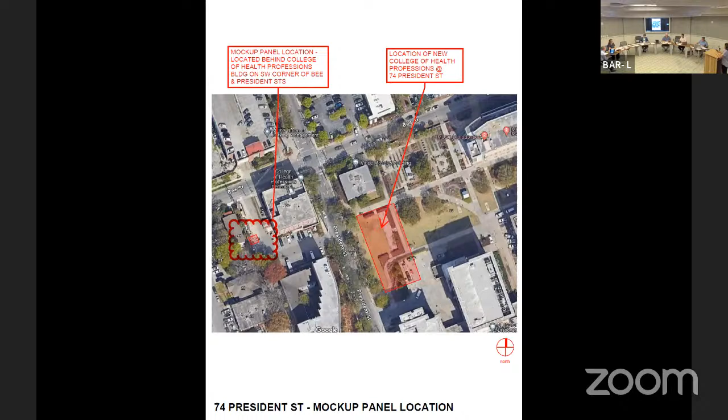First slide we have is the mock-up panel location, so that anyone that's able to go by and take a look can find it, showing the project location just south of the corner of Bee and President Street downtown. And then we have a couple of photos of the completed mock-up panel. I do have boards showing the full elevations if there are any questions about where the materials occur, where details occur on the building, that I'm happy to pull out.

The south side of the mock-up panel shows the stucco finish at the bottom, transitioning to ACM, the brick finish that will occur on floors 2 through 5 of the building, and then the ACM panels that will occur at floor 6 on the building.

And then the east side of the panel shows the stucco that is the first floor material on the building, curtain wall that spans on a couple of sides of the building from the 2nd floor up through the 6th floor. And then the setback metal panels occur at the penthouse level, the 7th floor of the building, and typically are set back from the primary building facades.

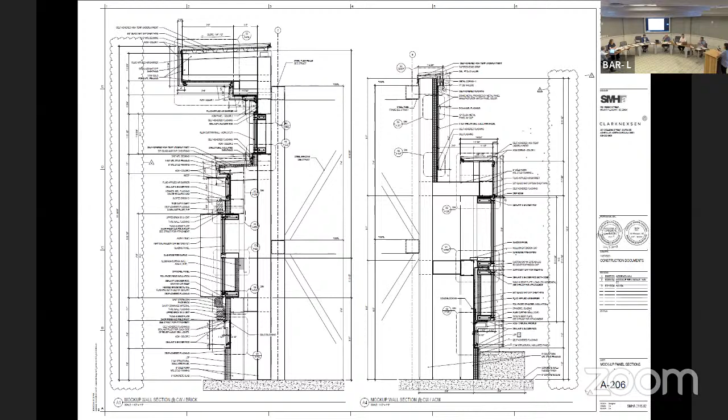And then we have sections of the mock-up panel and elevations as well. And that may be the end of our presentation. Thank you, Margie. Thank you.

Well, I mean, does anybody have any questions for Margie? And then public comment. I didn't anticipate that there would be. I know, but you know, we just protocol just in case. Yeah, you're right. Okay, yeah.

Sealant colors have been discussed extensively, and the applicant is willing to continue to work with staff until an acceptable generalized brick and mortar blended color is found, which may be used almost everywhere for elements in and on the brick wall. While the addition of the metal panel system below the storefront system is not quite as it will be on the building, staff is persuaded that it will in fact be an easier condition to deal with on the building and is therefore acceptable.

A more appropriate flood vent color closer to the stucco base color is being explored. These occur behind the historic wall and are minimally visible. And due to the length of the vertical fins at the storefront, applicant and contractor are recommending either exposed fasteners at intervals to match the storefront or the application of an extra trim piece to conceal them. Staff prefers painting of these small, distant, and minimally visible fastener heads with a high-performance exterior paint to help avoid maintenance issues in the future.

Conditions for approval: applicant and contractor are to continue to work with staff on all above items, and staff recommendation is for approval with board and staff conditions.

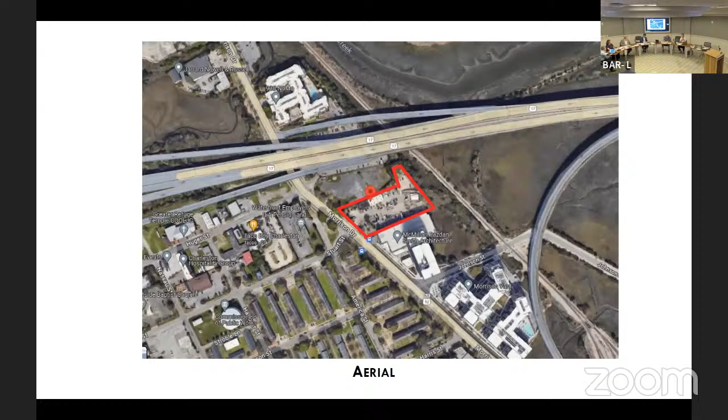And just to remind everybody, this is the location of the project. We're ready for applicant presentation. All right, yep, got a couple of show and tell for you guys. All of the administration, along with that. Representative.

I think I'm going to take a run at using the clicker. Is that all right? Got to be. Good. A couple things here. I'm not going to dwell on that, nor am I going to read this, but again, we want to really focus on a couple things. Specifically, the first item is what you see in the model there.

We'll also see more details of that, and that's more defined fenestration, more details. And you'll see that pretty clearly in comparing and contrasting between the previous renderings that we used last time and where we are today. And we'll talk more about the details and things that make up that composition.

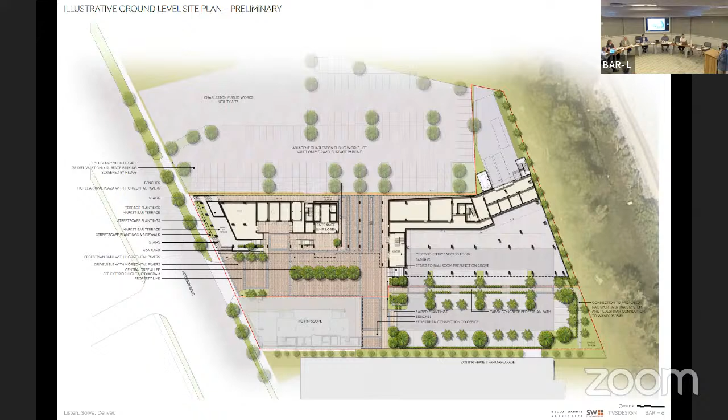You're seeing that a little bit more clearly here. We'll talk more about materials and you'll see some of those later on in the presentation. Not going to dwell on floor plans, nothing of significant change here that we haven't already addressed, so we'll click through those fairly quickly.

Here we get up through the building, typical floors. Again, these are before and after, so you're seeing a lot of what we had previously presented versus what we have now. No dramatic changes, just more development as you see in the plans.

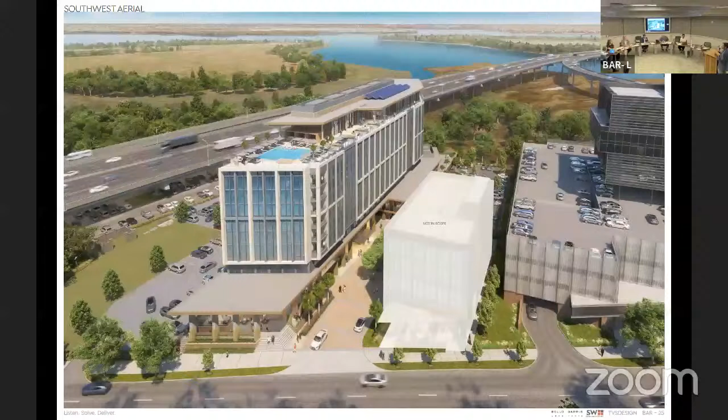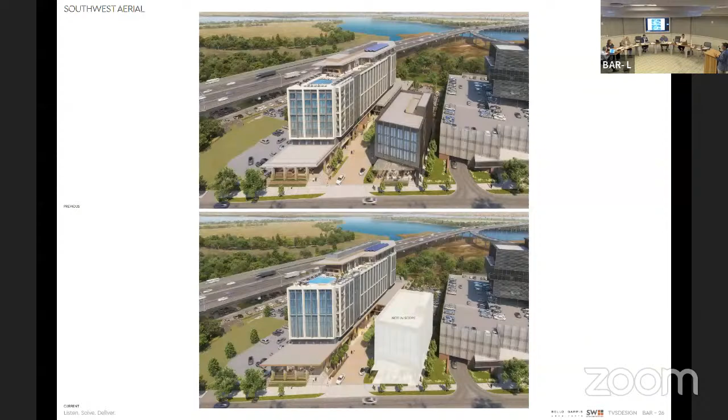An aerial view sitting within the context of Morrison Drive, the massing of the building. We'll see more specifically as we zoom in on the facade where we're beginning to create more articulation and definition within the facades. You're starting to see some slight color shifts where we're looking at GFRC materials that have more of a warmer tone, less of a white bright tone.

I think we're starting to blend those and find some unification in that color palette. You'll see that again as we move through some of these. I think this is a good example: the image on the top is what we presented for early phase last time we were here, and the image on the bottom is where we are today.

Specifically, as you look at the fenestration on that facade, it's pretty clear you see not only a color shift in the material palette, but the way the fenestration begins to work, you're seeing less of a pattern of windows that feels square-like, but things that begin to create more of a rhythm and a vertical orientation on the building. It's a big building, but the idea is to begin to break that down in scale and look at how beautifying those elements are.

We'll see some more details in a minute, specifically on the balcony edges. There were some comments previously about how they felt a little heavy. So as we move through this, you'll begin to see this is where we are now.

This is a zoomed in version, the north facade. As you look at this, you see the major components within the building. You're seeing the articulation of the frames. The lighter color is the GFRC. Inset within that is the window and glazing.

The glazing quantities are the same as what we had before, so there's no change in the glazing. We haven't reduced glazing, we've kept the same amount. You're seeing more details and refinement on the interstitial, or in between those frames, so you're getting some nice dimensional depth in the building and nice shadow plays.

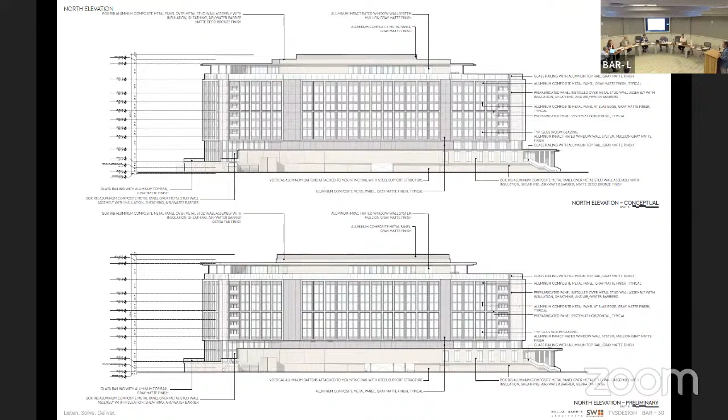And then as we get into this, we're starting to look at components, or what we call components. You're starting to take pieces of the building and really study that from an architectural character, image, details, how those work both in section, elevation, as well as axonometric.

And then zooming in yet again, you're starting to see how all those pieces come together. This is evolving. You're starting to see more refinement, not only in the facade and the fenestration, but the way we begin to resolve these as a system.

Again, we're just moving around, looking at different parts of the building that are unique, things that we need to begin to develop. Certainly looking at the top or parapet of the building where you're transitioning, looking at glass rails, things that lighten the top of the building and not create a heavy expression.

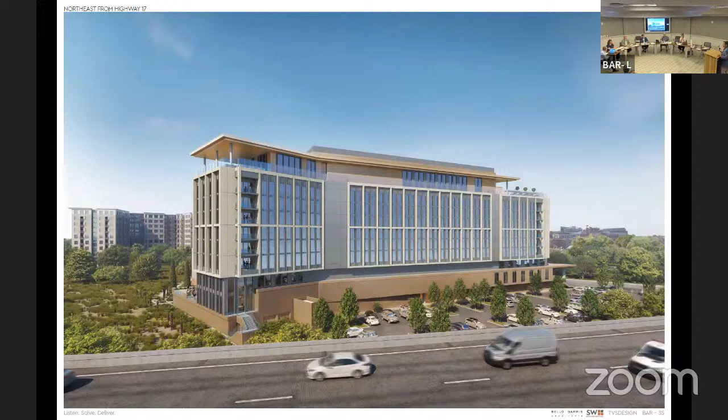More of an elevated bird's eye view, if you will, over the connector, looking back at the fenestration on that north facade.

Again, more of an eye level view, maybe an in-town approach view from Mount Pleasant. The top is what we previously presented. The bottom, you start to really register some of the articulation and the depth in the facade, the shadow play on the building, and things like that, accentuating that scale and mass.

Let's get more components, really taking a deep dive on some of these. This is the southbound view on Morrison. Top view is where we were previously, the bottom view is where we are today.

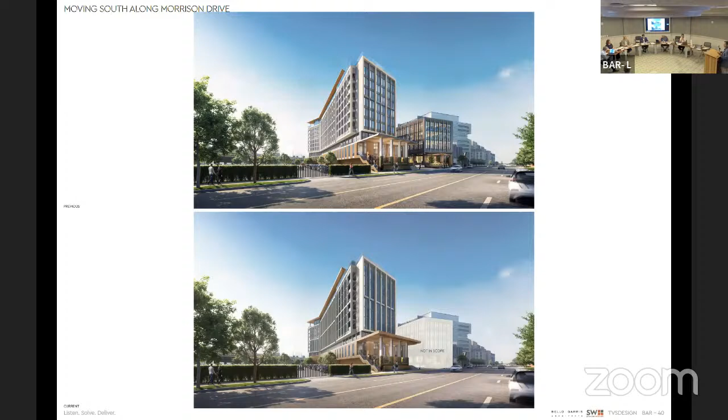Again, I think some really nice refinement in this, really getting the details starting to pop in this building, and having that shadow play and that depth in the system really, I think, is starting to help break down some of those different facades.

Corresponding elevations, again, more details, some views kind of looking down that arrival, entry into the development site, and through to the water again. Those have always been important, so maintaining those as vistas and view corridors.

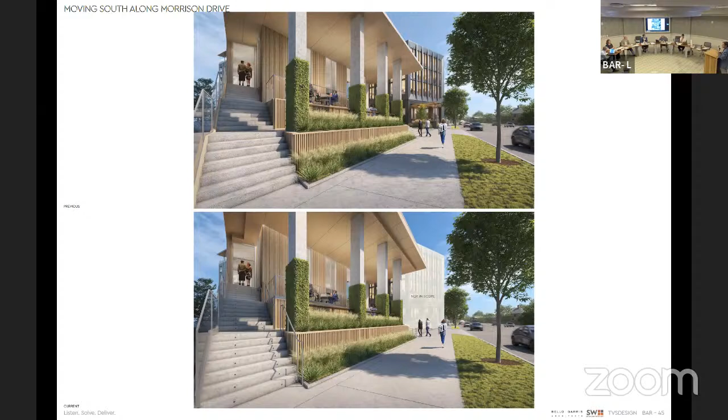Along Morrison, not a lot of change here, really, just responding to transitioning down to the street. We've got flood zones and other requirements that are making us elevate the building. I know we've had conversations about LiMWA and things like that elevating the building, so finding graceful and subtle ways to transition the building down.

More details corresponding to that, and a couple other views that begin to show again the before and after fenestration.

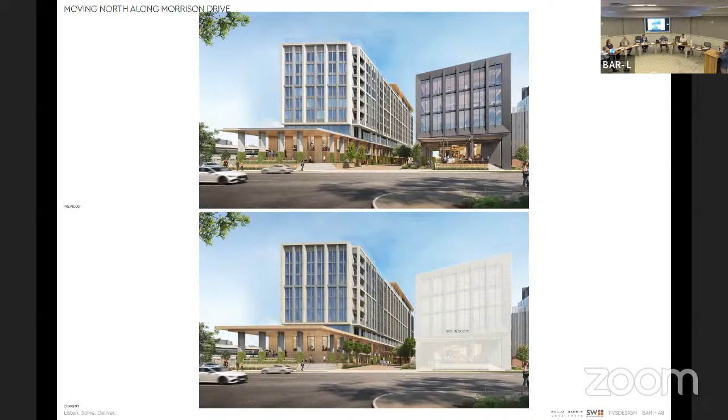Let's see, we'll click through these. We've got canopy details, other things you're starting to see in that model. Aerial views, again, just taking what we've shown before, beginning to show kind of an evolution to that.

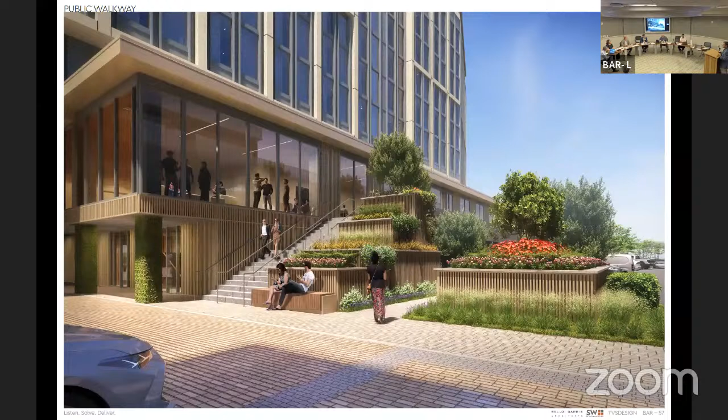Parking and plaza and arrival, looking at landscape solutions, hardscape solutions, how to begin to integrate terraces and other parking elements within the arrival plaza.

This is more of the material palette. So again, you're starting to see some of the hardscape finishes, and some of the landscape finishes that are carried through the project.

Lighting. We're all well aware of the sensitivity of lighting in projects in this context. So being sensitive to that is of paramount importance, but also making sure that we meet minimum code requirements, which is something we're obligated to do, but doing that in a sensitive way.

I think what we want to try to avoid - you want to maintain the code requirements for lighting, but do that in a very sensitive way. Something that doesn't feel like you're looking at direct fixtures, something that feels like it's more of a subtle illumination on the building, and not something harsh and dominating on the building.

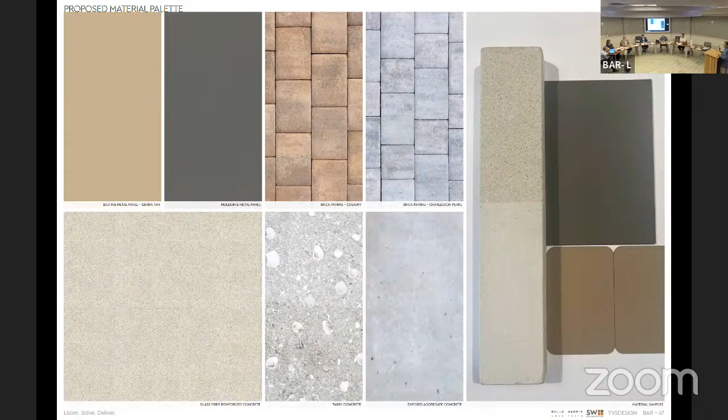I believe that was it, right? So I didn't check my watch. Okay, 9 minutes. Congratulations. Might be a first. Yes, sir.

Any questions from the board? Yeah, so the previous application had the adjacent building with it, and this one does not. Correct - what's the story with that? It's separate, and it's my first staff comment - it's separate, it'll come through preliminary on its own track. And I read that, but do you anticipate that changes completely in its application? It's gone through and been approved for height, scale and mass. Of course, is that right? That's right. So you don't anticipate starting over? We do not anticipate starting over.

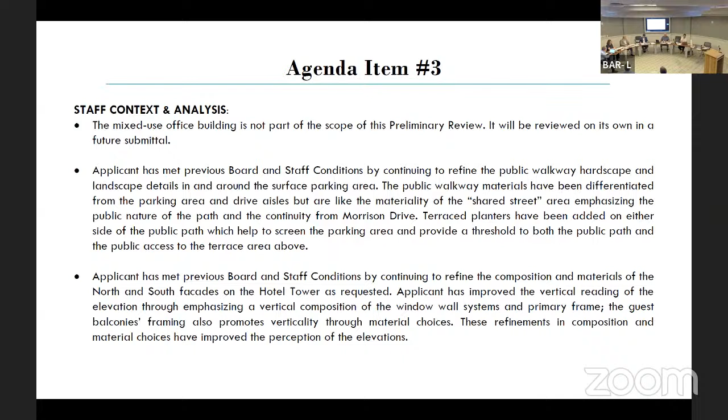Applicant has met previous board and staff conditions by continuing to refine the composition and materials of the north and south facades of the hotel tower as requested. Applicant has improved the vertical reading of the elevation by emphasizing a vertical composition of the window wall system and primary frame. The guest balcony framing also provides verticality through the material choices. These refinements have improved the perception of the elevations. We have no staff conditions for approval, and we recommend preliminary approval with board conditions.

Oh, I'm sorry, I got a text from my wife, got to answer that. All right, any applicant response to that? I imagine there might not be. I might have a couple of things to say. We had an extra minute.

Eddie Bello: just to emphasize on the lighting, it's early, but the intent is to follow the BAR policy. We do not want to light up the building. We just need some lighting at the ground plane for circulation. So just to be clear, and it's early, we've got to figure that out, but we do not want to light up the building. I want to make sure that's clear.

I think we agree with everything you said. What I wanted to stress was a lot of work has been done, as is the case after a conceptual to preliminary phase on a project of this size. We have gone through a lot with our contractors to ensure we're on track for pricing, which is a big deal. But the key takeaway is that as we've developed it, the building's gotten much better. It's much more refined, it's a lot lighter. It's a big building, but it's a lot more elegant. It's got more depth. I want to reinforce that it's not just more work, we've actually strengthened it.

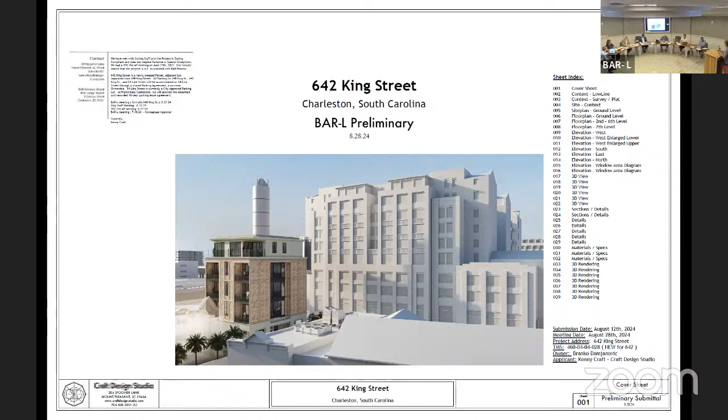Been moving along through the process. The backstory: we kind of worked our way down from 8 stories down to 5 stories, going through conceptual to preliminary. The refinement in many ways is sort of a hand-drawn schematic moving to some more refined computer drawings of context, right off King Street, right by the Crosstown.

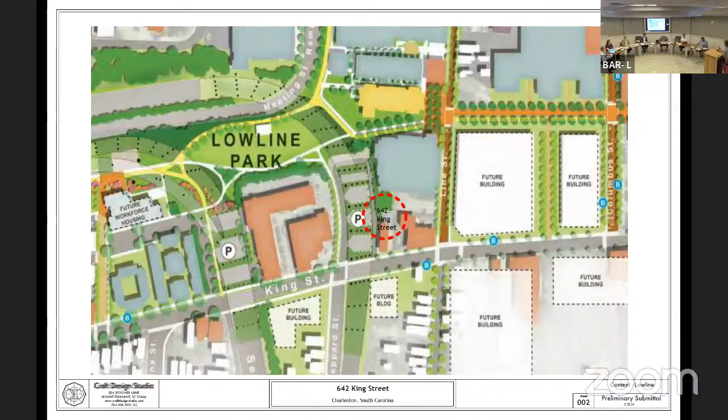It's sort of in the zone of the future Lowline Park—a lot of big activity going on, and a lot of exciting developments in the area, and a lot of building.

The site's front part has a historic house that had been previously renovated. The lot was subdivided so that the rear lot is where the new building is proposed. This kind of gives a little more context.

This ownership of 54 Line Street is shared with the ownership of 640 King and 642 King, so the parking is accommodated through the 54 Line Street parking—the buildings kind of all share access for this parking. Here you can see the 4-story zone toward King Street, as it transitions back to the 8-story zone.

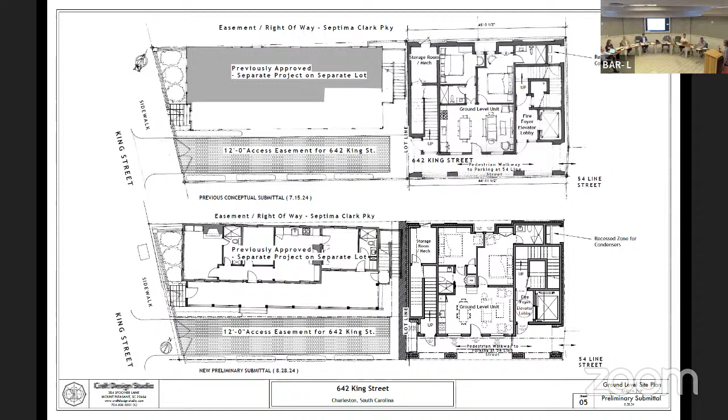This shows the before and after at the conceptual level. I kept it at hand-drawing level, so it's a little hard to see from this stage, but quite a few hours were spent going from hand drawings to computer drawings, with levels of refinement—drywall layers for fire ratings, and an ambulance-sized elevator for the 5-story building. So it doesn't look like a drastic change, and really the design doesn't necessarily change from the floor plan level—it's just a process of developing the hard-line computer drawings and refining all the details and window sizes.

One thing to point out that we worked through along the way is we have a recess alcove on the rear where we have condenser units mounted on the wall vertically, which allows us to not have them on the roof and get away from roof screening, which everybody was happy about.

The 2nd through 4th levels are the same, and this is the refined version of those. Besides refinement in the plan and an officially huge elevator for this little building, we've been working out the details of those sorts of things.

The penthouse level really doesn't necessarily change. Here you can see the hand drawings, how they look. We've got to a level of refinement with the computer CAD elevation drawings, refinement on the base is brick with smooth stucco and score, recessed lines, going with the Charleston tradition of the rusticated stucco base, transitioning to brick through the middle stories.

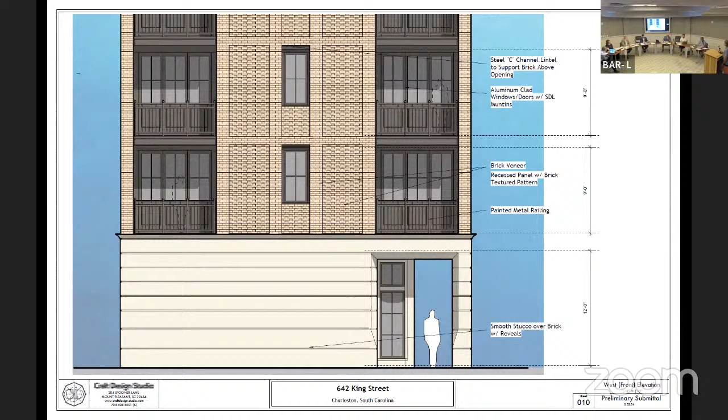We've got these textured recessed panels with a lot of detail that I'll show closer up. The penthouse level has an aluminum cladding system, and we worked our way from more of a shiplap look to an aluminum clad commercial construction. Zooming in a little bit, the design hasn't fundamentally changed, it's more a refinement in the computer drawings and refined details.

Also looking at the color scheme, we have this buff brick and an off-white color for the stucco base, and then also for the aluminum cladding above.

Rear, one thing to point out, as we're working out the details for the elevator, there is a little bit of an overbuild for the elevator zone that just so happens to go up a little bit higher. It'll really never be perceived from the front elevation or from the side, mostly from the rear. You can see just where the elevator goes up, there's a little bit of a height part of it. The way that the parapets are tucked, it's a very minimal detail.

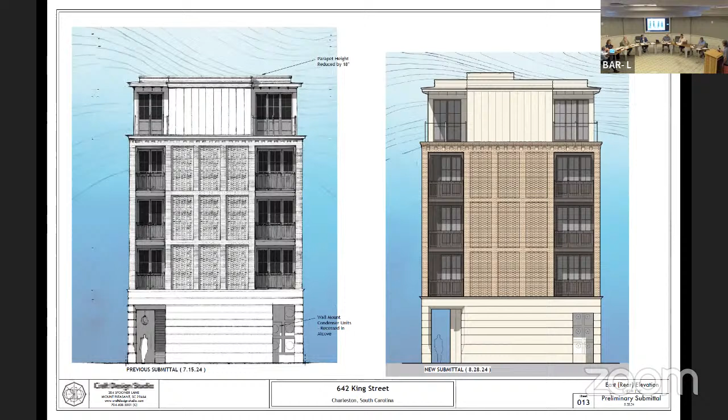As we talked about along the way, we are very closely looking at the percentage area allowance for windows, within the sort of 3 to 5 foot range. So those have been worked out, and obviously recognizing those will be closely in line with what's required by the building code and building department as we're moving forward in the process.

Side elevation is really the same. 3D model views show the stucco base, the brick midsection, and the penthouse level at the top with aluminum panels. Just showing some of the detail.

One thing I'll show more of the details, but one bit of refinement from the conceptual to the preliminary was a decision to simplify this cornice element, the brick cornice element. It previously had a buildup of brick, and then had a bit of a trimmed out crown detail. It felt like keeping it all brick, so it just corbels up, stops with the brick, and has a coping, then transitions fully to the top. I felt like that was an improvement in simplification, and it doesn't stick out as far as it did previously.

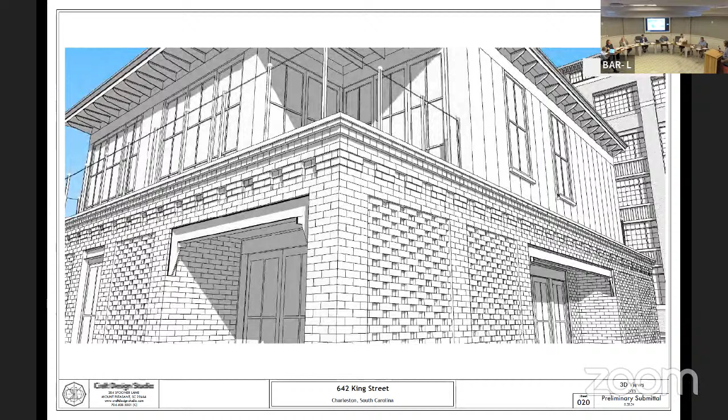Really getting into the details and the brick details, a cornice that has complexity, detail, and shadow lines. Then these recessed panels, there's basically a 1 inch step back and then a further step back. The back work around with bricks would essentially be a half cut brick. Load bearing wise, I'm really trying very strategically to make sure that it all stacks up and load bears - it really doesn't need a lot of steel and angles and that sort of thing.

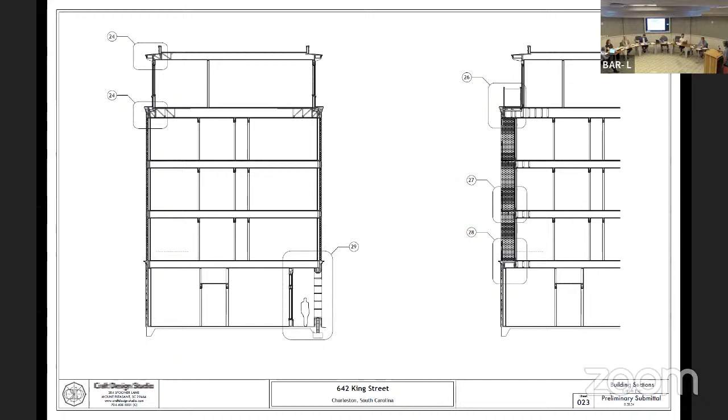Besides the primary openings, the primary cornice has these steel I-beam T-shapes with a laser cut profile. It's simple but elegant and kind of commercial, modern, traditional looking, and then a classic simple cornice, otherwise transitioning to the aluminum panels from below.

Zooming in on some of the details, really working out how the brick corbelling cornice and recess works with the stepping back. For the primary brick, we're at about a 2 inch airspace, allowing for some recessing and pushing back, showing some of the details coming together and getting refined for the cornice. Trying to show it in 3D simultaneously to really see it better, more accurately.

We have the railings - steel posts with glass panels to really have a transparent look where you experience primarily the penthouse. And where the roof deck is, looking at a pedestal paver system with roof drains.

We have really, it's a tight site. We're going to have a series of internal drains that bring it all down and bring it into a water catchment area that's right between, part of the easement of the lot. Bring the drainage through, and we work with the civil engineer on the drainage plan for that.

Balconies, I've looked at some detail, steel railing details, and this is a detail looking at the actual balcony itself being made of C channels with a simple ipe or long lasting, nice elegant wood, just very simple. So steel C channels and wood.

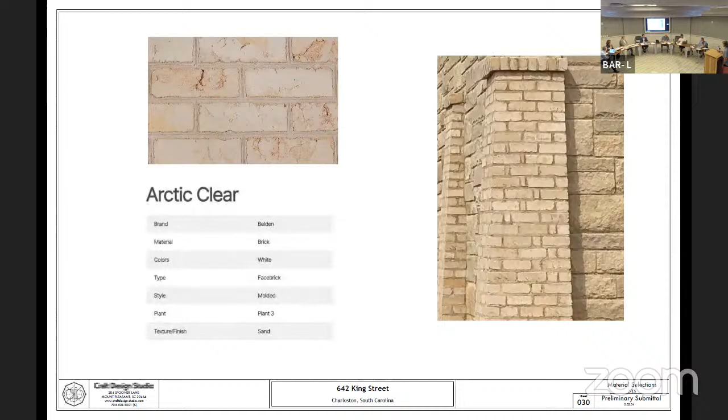Aluminum cladding system - there's a lot of aluminum cladding systems that have those little J channels that look like vinyl window cladding systems. So we're looking at a nice cladding system where the edges terminate very cleanly, and you can turn the corners. The aluminum cladding details will work nicely to interact with aluminum clad window systems to really tie together nicely.

Lighting wise, very simple. It's residential units, adequate lighting, but nothing over the top, really some simple sconce structures or sconce fixtures, LED Edison bulbs, very simple, minimal, low lighting. The balcony lights may never turn on, it's ambient light from downtown Charleston, but having that option, and then along the bottom, a series of these sconces too.

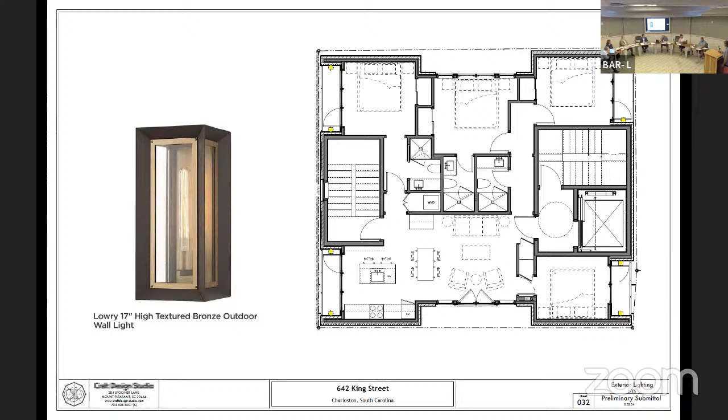So there's not a lot of need for exterior lighting on this building besides the pathway lighting and a little bit of accent lighting. Here's some of the 3D views that give the effect a little more rendered, with stucco, with the color scheme with the buff brick and off-white color.

I do have a couple questions. You called out the cornices - at the very, very top, is that fly ash? What is that? What I'm trying to achieve is actually fly ash, a composite material that's not wood, not fiber cement, but it's composite made from fly ash, the byproduct. Yeah, I'm familiar with fly ash.

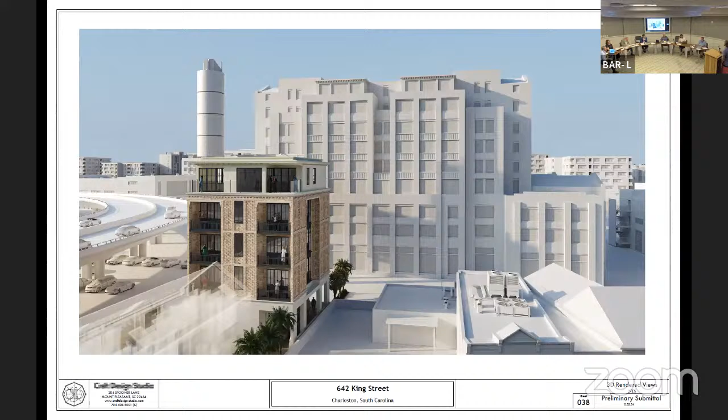I'm just trying to picture, does that have a sheen or is it matte? It would be painted composite, and really the penthouse level in general has this - it would have the aluminum cladding.

In my opinion, what I'm trying to achieve is just a refined, human scale with attention to detail, and with composite material I feel like trying to create that with aluminum would get clunky - it's a lot of refined details to try to make perfect in the joints. You're going to be up there on that deck looking at this cornice, and I feel like it could be done very elegantly with some human scale and detail by actually using some actual moldings, being kind of Charleston traditional but also modern and clean, low maintenance materials.

Okay, thank you. Continuing on that, I'm glad you have - it's more just for information. So right below that fascia board there, is that also fly ash or is that some kind of Hardie panel? What is that? The fascia would probably be that fly ash material also, so that's like a one piece thing.

And then what's the soffit? What would I see if I'm looking up at this? Probably, I think we're looking at something similar - besides the corbels or the brackets that were made of steel, the rest of the assembly of the cornice would be a composite, painted. So underneath would be this fly ash stuff too? Yeah, I think that's the idea we've been looking at.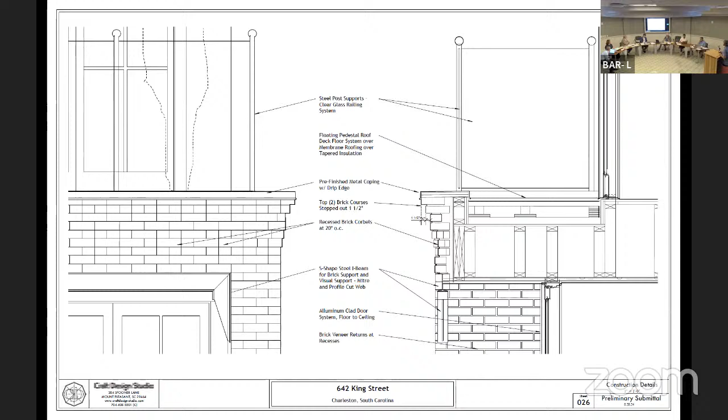It would be anchored in through the brick to the cavity behind it—anchored into the brick for sure. Similarly, some of the 3D views show it better, and you did that in the stucco too. At the window in the middle, I'm thinking that I-beam might notch into the brick and tie it back in, sort of bearing on the brick. The idea is that where the brick can be load bearing, it really does stack on itself, but where there are larger openings, the lintel is expressed with a steel member that shows the structure and also supports it. Okay, thank you. Any other board questions?

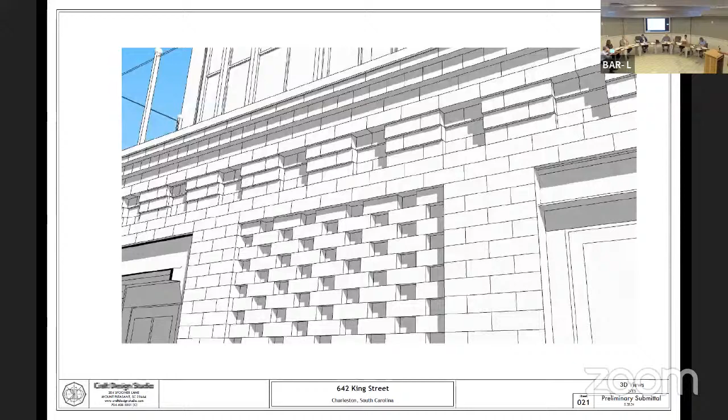Hearing none, public comment regarding this application. Hearing none, staff comments and recommendation.

Applicant has made modest revisions to the elevations of the penthouse, which slightly increase the amount of glazing on the elevations, hoping to continue to lighten the appearance of the top. The detailing of the steel T-shaped corbels at the penthouse cornice and the brick corbelling at the fourth floor cornice are details that provide interest and enhance the design, as does the textured patterning in the brick panels in the main body of the structure. Staff support the material and color palette as shown. Staff conditions for approval are the condition you've seen before, Mr. Craft, which is just if the building has an issue with the setback of the windows, it just needs to come back to us. Staff recommendation is preliminary approval with board and staff conditions and final review by staff.

Okay, any response or clarification with that? Okay, board discussion and a motion.

I'll start since I asked a bunch of questions. I wasn't here for the first go round, but I think it's fine. I like it, I think it's pretty well done. I think there's some thought needed, a little more thought on some of those details. I think it will be harder to do, but I'm comfortable with the board and staff handling that. Not worried about it. I think some of that's tough.

My only comment, and I'm probably in the minority, and this is way down the road—I didn't think you needed a darker color mortar, kind of random on the brick. I think you've got a lot going on in this building, and to me it ought to be very simple. It's just a really nice proportion. I don't think you need, personally, a lot going on with the brick. I think the brick ought to read simple with all the details you have, and not accentuate even more with a different color. So that's just me, but I think the details and design have developed really nicely from last time. I'm in support of it.

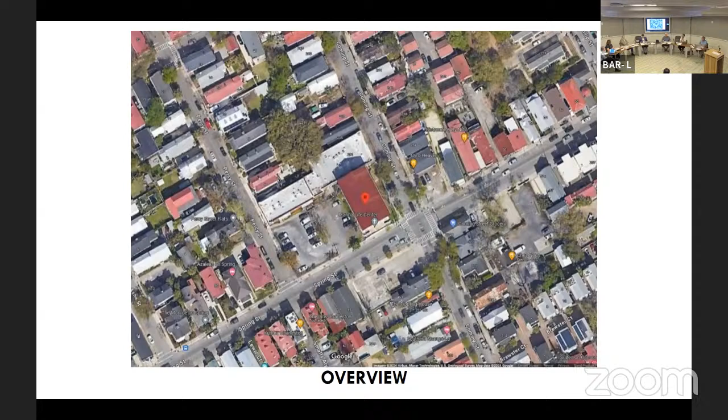Okay, and now we're ready for the presentation. Thank you all, good afternoon.

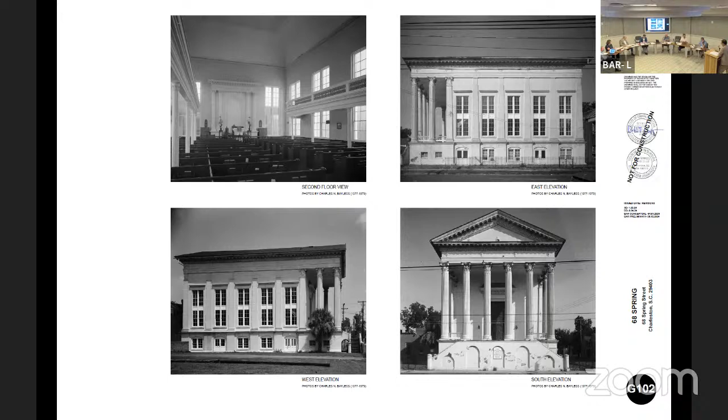Secretary of the Interior standards state that it's often necessary to make modifications to a historic building to make it compliant with accessibility code requirements. Work must be carefully planned and undertaken in a manner that results in minimal or no loss of historic exterior and interior character-defining spaces, features, or finishes. The goal should be to provide the highest level of access with the least impact to the historic building.

Oops, I got the clicker glitch. Oh, sometimes it helps to point back to the laptop. Yeah, if you point at the laptop, because that's where it's receiving. Right, and you go left.

This is the previous bird's eye view of the previously proposed massing for the three-story west side addition. And comparatively, this is our current proposal seen from the same bird's eye perspective.

At the April reading of this project, the primary board concern about the proposed addition to the west side of the property was that the addition was too large and altered or concealed more historic fabric of the existing structure than what is required.

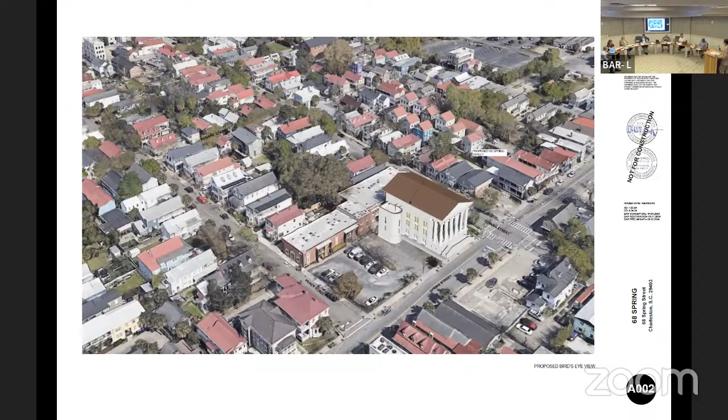Through a lengthy planning study, the team was able to reconfigure the first floor plan of the historic building to include 2 of the 4 required restrooms. Further study of the third floor allowed us to include the remaining restrooms there. By doing so, we reduced the footprint of the proposed addition significantly.

This depicts the previously proposed west side addition in red, overlaid on the current proposal, something in the neighborhood of 67% of the square footage and parking.

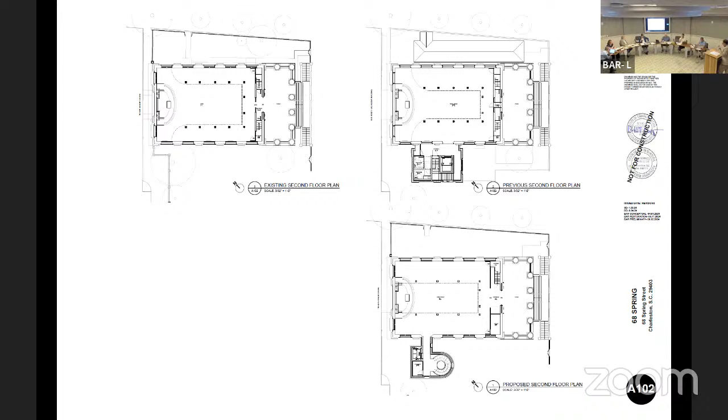Additional board comments about the proposed addition included criticism of how the addition connected to the building. In response, the current proposed design includes an elongated and significantly recessed hyphen. The relief created by this reveals more of the historic building when viewed from the street, and only 1 bay of windows and doors need to be removed, with no alterations to the masonry openings to make that connection, as opposed to 2 bays previously.

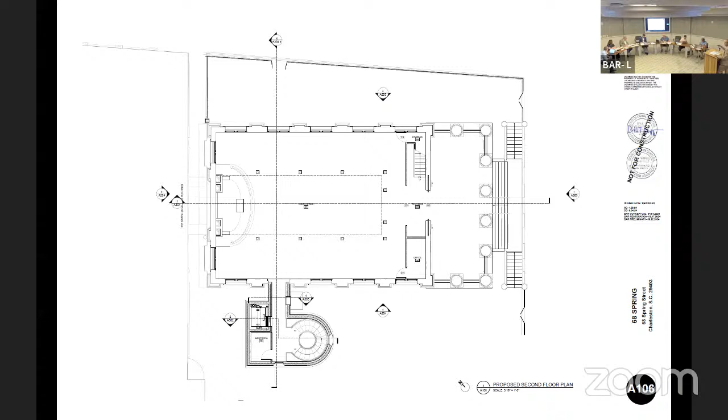Another previous board comment, as well as requests from staff, were to reduce the height of the addition. The addition includes an elevator with its required height clearances, and all exterior HVAC equipment is designed to fit on the roof of the proposed addition. While the height of the proposal is primarily driven by its proportions, the mechanical requirements and their screening were also of consideration.

The height of the proposed addition is appropriate because it allows a distinction between the parapet height of the hyphen and the main stair volume. To reduce the height further gives the proposal a less elegant appearance. The heights are differentiated from the existing building in that they do not align with the column capitals nor the pediment frieze. The staff comments required we restudy the architectural direction of the proposal.

Some comments directly asked that it be of a distinct and lighter appearance than the historic building. Our team has since created detailed studies of alternate architectural directions, including a modern glass box, a modern copper box, and a version using wood siding.

It's our opinion that all of these architectural languages called more attention to the addition rather than less. Secretary of the Interior standards state that a new exterior addition to a historic building should be considered in a rehabilitation project only after determining that requirements for a new use cannot be successfully met by altering non-significant interior spaces. It further states that a new addition must be compatible with the massing, size, scale, and design of the historic building. New additions can be any architectural style, traditional, contemporary, or a simplified version of the historic building. However, there must be a balance between differentiation and compatibility to maintain the historic character and identity of the building being enlarged. We agree with these statements and believe this proposal achieves the necessary balance between compatibility and differentiation.

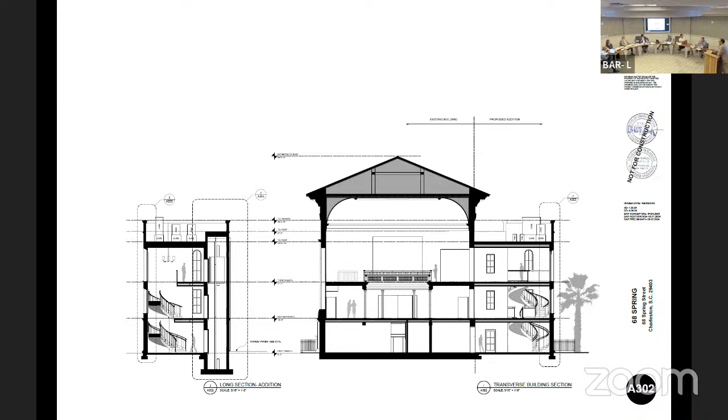So, David, I'm looking at your section on sheet 302. It sounds like part of the reason for the height is two reasons: one, you like the proportions, but also to hide the mechanical. Yes, to both. So when I look at your section, you probably don't have it completely figured out, but you've got a pretty tall curb.

If part of the height's being driven by the mechanical, is that accurate, I guess, is what I'm getting at? Glad you asked, because it has fully been designed by mechanical engineers. All of the HVAC for the entire building, including the proposed first floor use, has been specified. Those curbs are seismic, and they are unfortunately that tall. So I can blame Mr. Bennett for that. Actually, no, you can blame the mechanical engineer. That said, if Mr. Bennett wants to get in deep with the mechanical engineer and we can alter it, we're happy to look at it. I think there's some nuances and some rearrangement that could happen to get minimal reduction based on the angle, but I don't think that's the ultimate driver for why we think it looks the way it looks.

So you said that height is based on the proportions. We did. All right, second question, and it sounds like I know the answer, but did you consider alternate materials just for the height portion? We did. We went through this, because it's been a while since we were here, and we weren't here the first time. It's been a couple months, and I think this group's probably had no less than four charrettes. It's quite a brain trust.

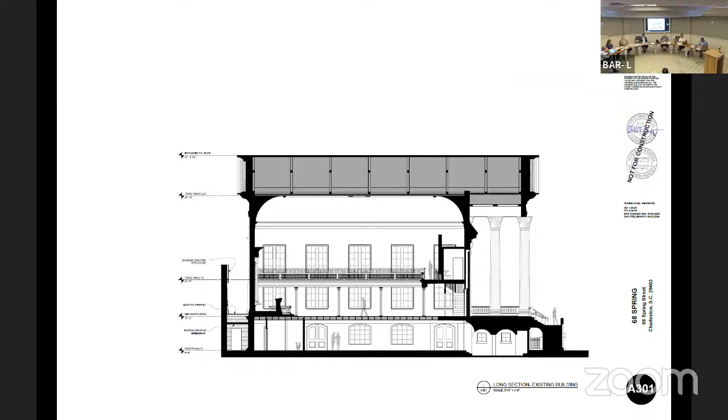Please, staff comments. First, I'm just going to quote from the previous board and staff conditions related to the current scope of work. First was: find a way to allow this addition to be accomplished while reducing height, scale, and mass. Second: hyphen needs to be more pronounced. Third: bring down parapet as much as possible while still screening the mechanical units. Fourth: provide more visual separation between the mass of the addition and the historic building. Next: articulate the blank wall portion of the west facade of the west addition with fenestration. And finally: reconsider architectural direction, with board discussion emphasizing a lighter glazed mass that would be architecturally distinct from the historic structure.

The applicant followed board discussion by moving the restrooms and storage into the historic building, which allowed the footprint of the addition to be substantially reduced and more of the historic structure to be revealed, and are applauded for this effort. The applicant also introduced a hyphen connecting the elevator stair addition to the historic building as requested at the previous meeting.

Staff support the height and scale of the hyphen as it allows for a clear reading of the entablature from all directions. The placement of the hyphen allows the applicant to follow BAR Charleston Standard Policy Statement number 9: additions and modifications should be undertaken in such a manner that if removed in the future, the essential form and integrity of the historic property and its context and setting remain unimpaired.

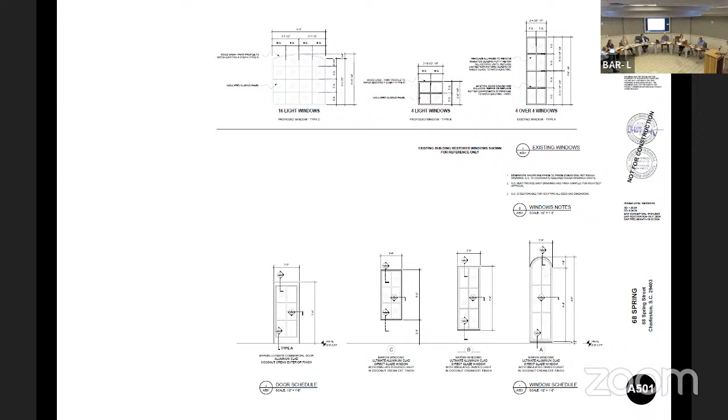In terms of fenestration, you can see the existing building fenestration demonstrated up here, proposed here. I think they're wildly different in terms of pattern, proportion, not to mention construction of the windows, but still being in a compatible language that's going to be timeless.

And then in terms of the specific detailing, and I would say the use of mimicry, I don't have a problem learning from that building. So we've gone out and we've detailed the existing conditions as a reference point, and you will see similarities and you will see where we've drawn from.

But you also will see, verbatim, from number 9, change in scale of those, change in use of them, reduction and simplification. So I feel like when we're talking about a building of this importance, that has a classical language that holds true today, it's a perfectly reasonable direction to go in to pull from those, as long as we're not verbatim repeating in the same usage.

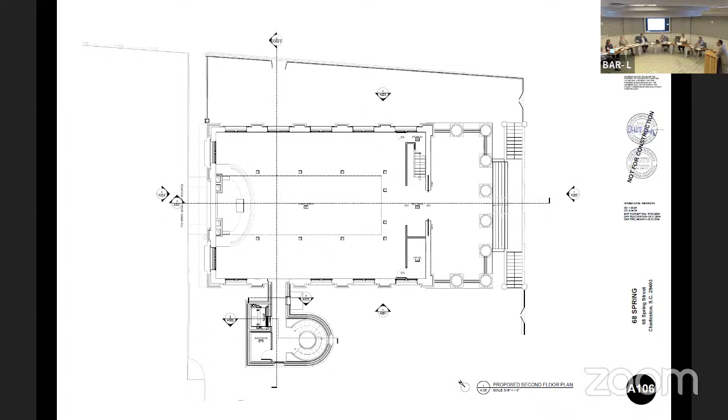So there is an easement with the Abbey structure that occupies that portion of that rear corner that is positioning the addition. That's the dotted line on the plan, you can see it here.

And what's the substance of that easement again? It's to provide access.

Obviously on the site plan, this is a 10 by 20 area that is actually located on our property. When the Abbey and our property were subdivided back in the late 1990s, their property corner hits here and our property corner hits here. That meant that if you were coming off of Percy Street, you would not be able to access the other side, which is on Coming Street. So this 10 by 20 is that pedestrian walkway so they can actually access the other side of their property. We cannot build anything in it, because we have to leave it open for them to access the other half of the property. If you look at the Abbey, it expands from Coming to Percy and onto Spring Street, but where their property corners touch, there isn't a point of ingress or egress to get to the other side. So as part of that easement agreement, that 10-foot by 20 area is their access to the other side of the building.

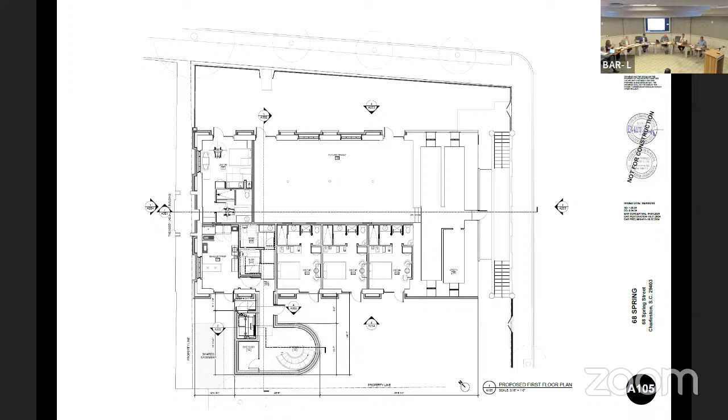Mr. Thompson, I want to compliment you on one of the best presentations by an architect, apologies to the table not standing, that we've seen during my tenure. It was very thorough and very well done. Appreciate you guys making this project... I want to do this. Such a great session. Yeah, that makes sense. In the house, right? All right.

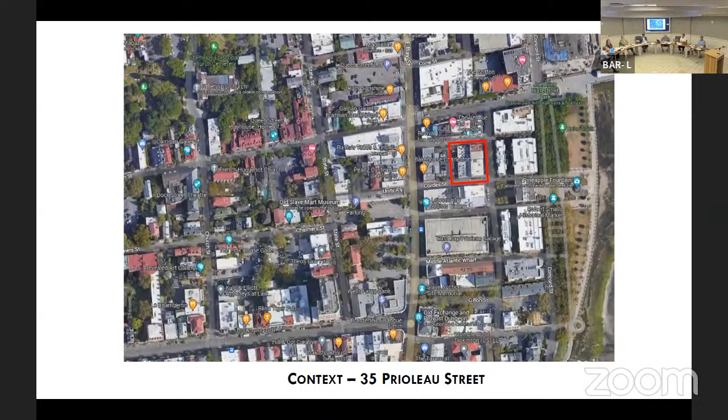I'm Simons Young, here tonight on behalf of my client, who is a prospective buyer for 35 Prioleau. There have been a few BAR proposals in front of you, but this is a totally different program — it is for an event space, and we feel this is also the lightest touch that's been proposed for the building.

In 1816, the land was filled in — it was marsh up until then. In 1820, the building was built. Since that time, it has been cotton warehouses, a coffee roastery, Sokol furniture, Wagner dry goods storage, and a few other things.

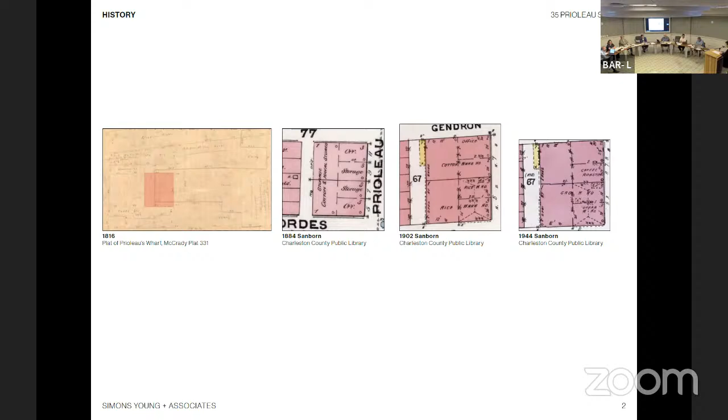So it's a concrete floor structure with open web steel joists on the floors, including the ground floor, which has significant saltwater intrusion — we'll talk about that in a moment.

So sounding, fixing and painting the spalled stucco is what you'll see, replacement of the deteriorated windows that are not original, and shutters also, then rebalancing the fire escape on the south side of the building, and refurbishing the exterior sconces.

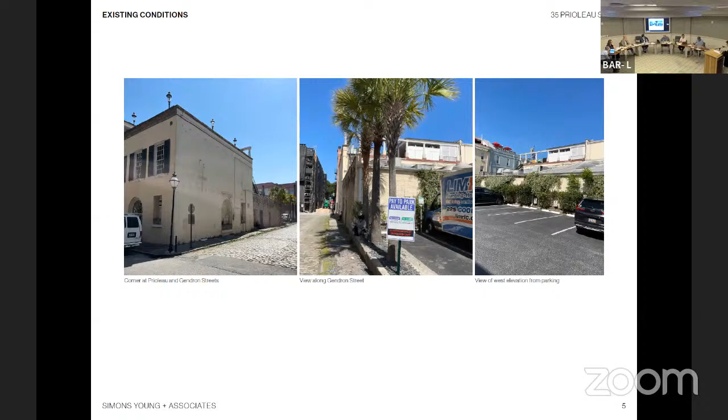Also, some of the niches in the building — you can see on the left-hand side, they have little planter boxes with condensate lines that drip into them — so we would remove those and get rid of that water problem.

And then these are the windows, some of the existing conditions, the shutters. The second from the right on the top line, you can kind of see how they're falling apart in a lot of locations.

And then these are insulated glass windows I mentioned on the upper floors. We're proposing to go back with clad insulated glass on those floors, simulated divided light and simulated muntin bars. On the first floor, we propose to keep the arched wood windows, which are salvageable. We think they can be braced on the inside, and then replace the other windows with single pane glass.

The idea being at ground level, you notice that a lot more than anything above your head, which must have been the approach when it was done.

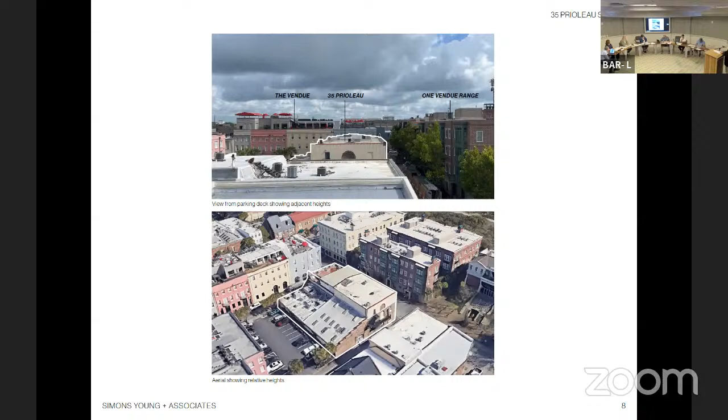The other existing conditions, this just shows the context. One Vendue Range on the right-hand side, you can see their windows align with ours, and we'll show that in the drawing in a minute. The Vendue, the rooftop, off to the left.

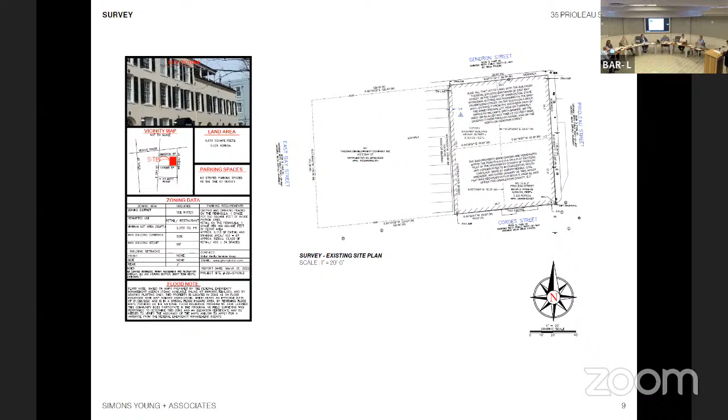The building occupies 100% of the lot. There is no parking; we've got a variance for 66 parking spaces. I think you'll see in your packet, hopefully, the neighborhood association wrote a letter of support. They're enthusiastic about the building coming back to life after 2 failed attempts and 4 years of being neglected.

We're excited too. This is the first floor. I'm not going to spend too much time on this, besides to say on the left-hand side, that's where the new ramp is coming in, and that's on Cordes Street, the south side of the building.

We're reducing the size of the kitchen, and all the entrance locations are unchanged, not altered in any significant way.

This is the existing second floor, largely the same layout. Mechanical, you can see on the upper right-hand side. We will be working with Charleston Engineering to figure out exactly what that is. We know it's plenty of space, but then we would screen that mechanical equipment because it's very visible if you're walking from East Bay Street towards this structure.

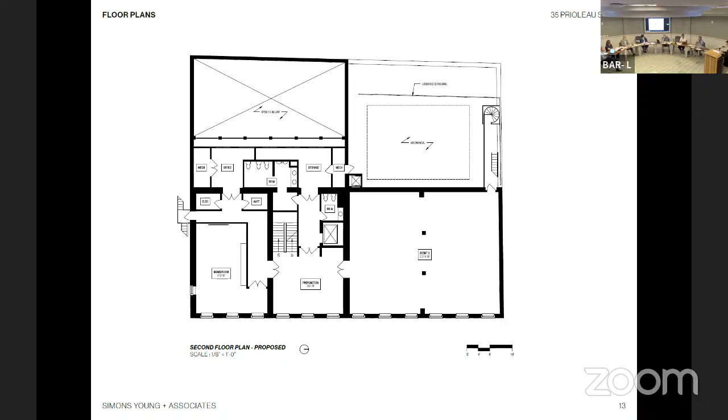And third floor, again, you can see the skylights that we're working on consolidating and cleaning up, resurfacing the roof. And then this is the rooftop, and we'll show an elevation how we're dealing with this, proposing to deal with this sound mitigation issue, particularly on the east side.

I think this is just a roof plan. We are keeping the existing terne metal roof and recoating it. Good, those are kind of hard to come by now.

So streetscapes, just to show where our building is, where 35 Prioleau is in relation to some of the other structures nearby. The main one to consider, I think, is this one where One Vendue, the city built these or sold, built these condos after the Colony House, somewhere in mid-Colony House times. And the roof structure is on the left-hand side, so it's a mid-level on the second floor apartments.

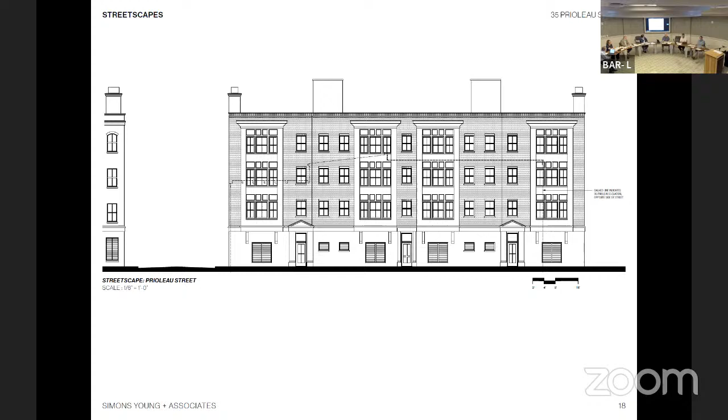This is the east elevation, showing the windows that we are proposing to remove and others that are proposed to stay, just the arched windows. We're refurbishing the existing lighting, and we're getting close to the end — I know my time is tight — and the decorative metal guardrails.

So the steel frame is on the roof structure. We've tried to take the lightest approach possible, keeping in mind Charleston Standard 9 about removable structure. So this would be a frame to which the sound curtains could be applied, and as part of the setup for the operations of events, that would be something that happened if the event goes beyond 9 o'clock or whatever the time is in the letter.

This is the south elevation, the reworking of that door. The ADA entrance is the most significant thing. There's actually screening, like a sort of screen porch vestibule thing there now with those windows beyond. So it'll be a marked improvement.

And then the north elevation, there are plywood panels that cover part of these abandoned windows, so we would remove those and figure out the best way to repair that, whether it's infill with masonry or infill with stucco to match the rest of the building.

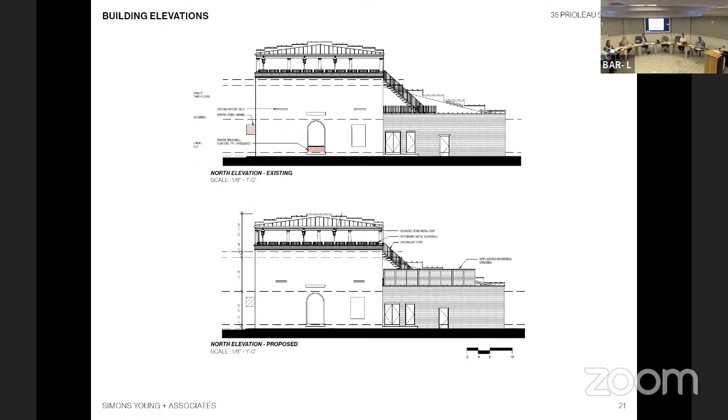Developed. There's the mechanical screening on the lower right. And then this is the west side of the building, again with the mechanical screening on the lower left.

And the new skylights. This is a product that may be typical of what we're trying to develop, and these are panels which would be installed during this particular event time, and then uninstalled. We are looking at a storage closet on the roof, and they would be similar to flood panels, where you install them if there's a hurricane coming and you have to store them on site. Same thing would be proposed for this.

And the other thing about the agreement, which I can read excerpts of if you like, it also has to contain light, so we feel like that's an important part of the curtains. And those are the two perspective sketches that show the view from the street. And with that, I will close.

Okay, any questions of the applicant by the board or staff?

On this view, the steel frame does not continue across the back to the right. Correct, so the sound panels only need to be on the one facade. Sound only goes that way. Doesn't go the other way? As far as One Vendue Range is concerned, yes. However, subsequent to this application, another resident from the west side did approach us and say, can you put this on the west side too? So we are ready to move forward with that, and I think the next development you'll see that and possibly a bit more. Thank you.

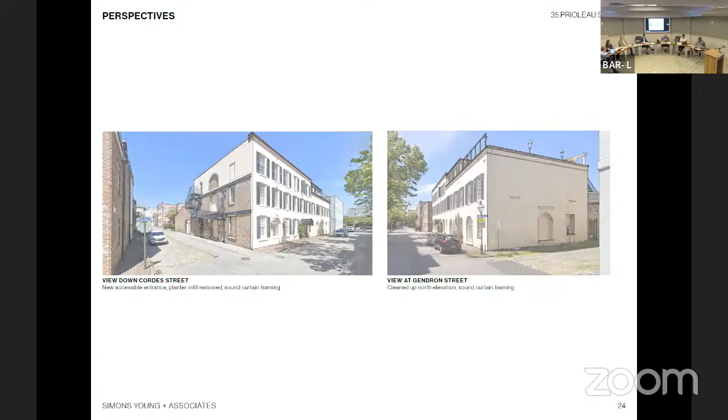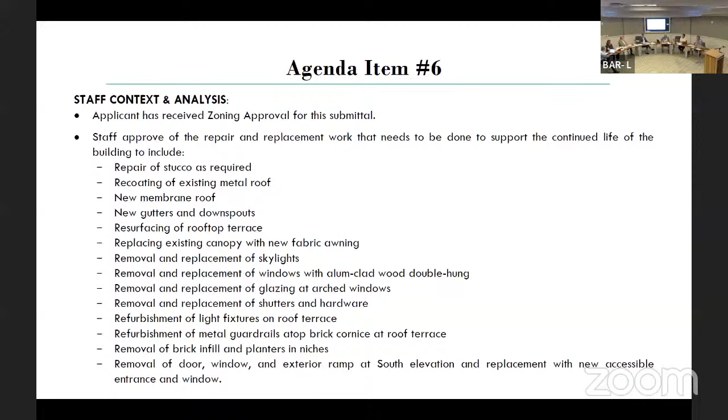Any further public comment? Hearing none. Staff approve of the repair and replacement work that needs to be done to support the continued life of this building. I'm not going to read this whole list, but I'll say it is everything except that which relates to the sound abatement on the roof. Otherwise, everything else is good with us. Staff require restudy of the steel substructure and sound curtains being proposed. Staff encourages either a completely temporary solution to sound abatement on the roof, to be installed and removed for every event, or a more permanent solution that is elevated architecturally and complements the existing historic structure.

If the applicant pursues restudy of a more permanent solution, staff requires that it circumnavigate the entire cornice at that level to include Gendron Street. I think of the first historic photo where it shows a decorative railing going all the way around. That's what I mean by circumnavigate.

The last sentence was based on the fact that staff had not seen the zoning requirement towards lighting. So when I say encouraging exploration focusing on transparent, that's because I only thought it was about sound mitigation and potentially not light. I didn't know about the light requirement. But add that we're concerned that opaque curtains may remain installed for unknown periods of time, not just for the event. And unlike HCF, we don't have the capacity to do enforcement of those staying up for long periods of time.

Staff conditions for approval: restudy of sound abatement approach is outlined in staff context and analysis. Staff recommendation is for deferral for restudy of the steel substructure for sound curtains. One thing I will add, that I didn't put in here but spoke with the applicant later about, is that staff is comfortable doing all of the other elements as a permit by staff review, and just having the restudy of the sound abatement coming back before the board if the board were so inclined to go that way. So we don't normally separate things, but we are happy doing everything else as a permit with staff review and just having the sound abatement come back before the board.

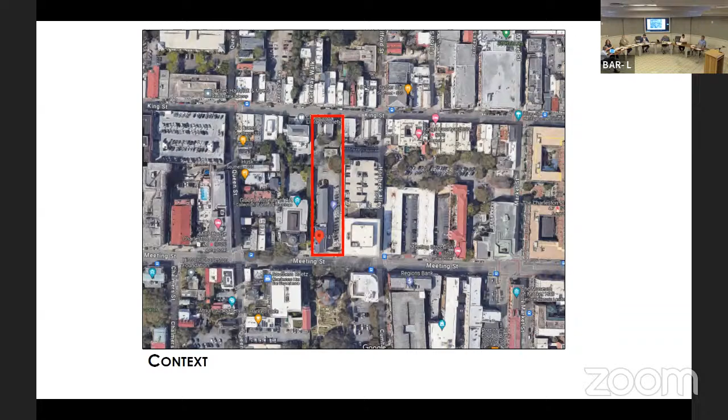One last application, and a reminder to those who might have joined during the proceedings, because we're down to one meeting a month, we're really trying to stick to the allotted time limits for each phase. So, 141 Meeting slash 174 King in 10 minutes or less. This is a larger site that includes both a category 1 and category 3 buildings dating from the 1870s, in the Old and Historic District. They're requesting a conceptual review of a new park plan, modifications to 174 King Street, and addition and modifications to 141 Meeting Street Building and Building Link. Just to remind everybody of the site, here it is. It's fairly large, so the applicants will be presenting in 3 parts. Ready for applicant presentation.

Hello, I'm Ted Rich with Beemok Hospitality Collection, and we're excited to be back to present this project for conceptual approval. As BD mentioned, it's going to be presented in 3 portions: the 174 King, the event lawn and community park, and then the 141 Meeting building. We are asking for conceptual approval for all 3 components of the project, with associated final details going to staff at minimum, if conceptual approval is granted, for at least the park portion, so it can move forward with TRC and stormwater and everything else. I'll turn it over to David Burt to begin the 174 King building.

Racing to the podium, hit 10 minutes. Okay, so as he said, we're gonna break it down into 3 parts, but I also wanted to point out that last time, specifically on 174 King, we were asked to simplify by Historic Charleston Preservation and by you, and I think we achieved that. We were also asked to work a little closer with the landscape architectural team so it didn't look like a building that wasn't working with the park. I think we've achieved both on 141 and 174. So this is just 174, the building.

I don't need to revisit all of that. Before and after, basically the footprint didn't really change very much, with the exception of making sure we minimized where we were, shown in the elevations, where we did not cut as many holes in the building. We're basically trying to use those openings that already exist.

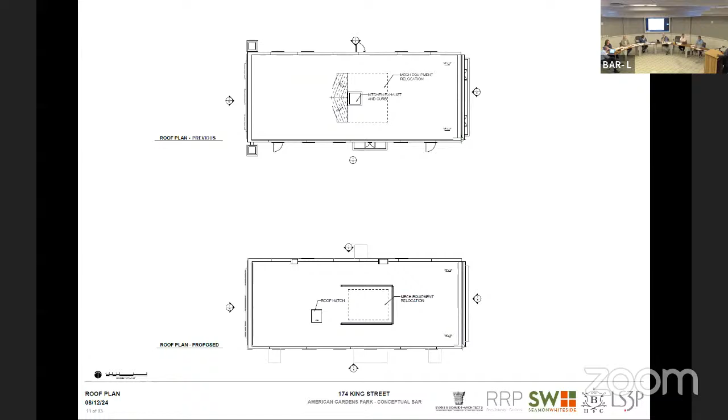The other thing that's changed a little bit here, you'll see it when David Kelly presents the park, but the railing and the fencing has changed slightly to work better with the building.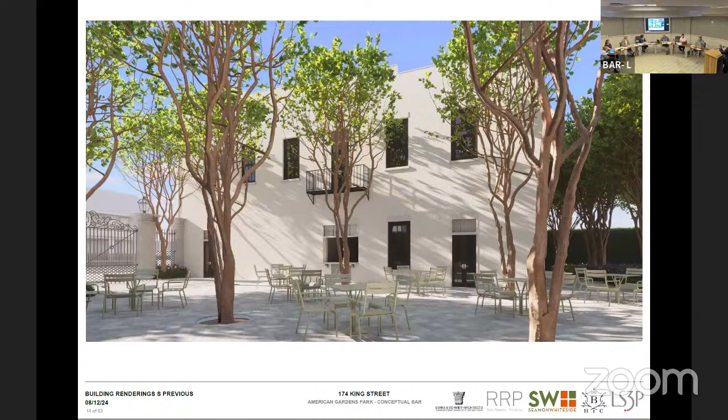The transaction window - so it's not, I don't know who said it, but it's not McDonald's. That was me. Okay, Mr. Bello. Sorry about that.

We got rid of the, I'll go back and show it back and forth, we got rid of the balcony. You'll see the balcony that was above the transaction window is gone, and now that's just a window. And then we just put awnings over all of those openings.

The opening on the far right is the entrance to the cafe. The opening on the far left is the entrance to the restrooms. And we integrated the park a lot better into the design.

This was the before, the other side of this building. This is the after. Now here, the trees got lightened up. Again, not really relevant to what we're talking about here, but we did it.

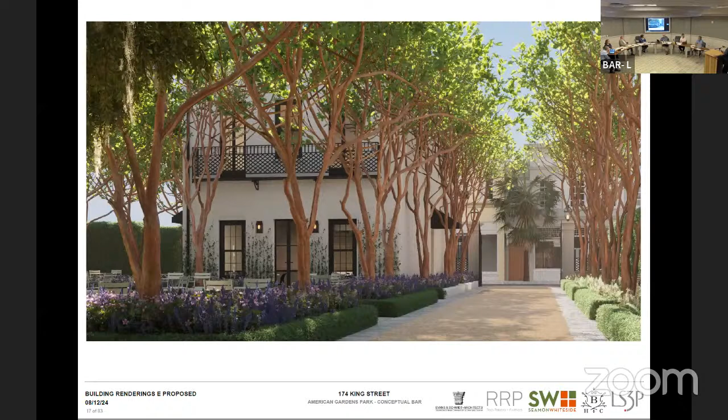And then we had 3 doors opening onto the park. We were asked to keep them in the context of what they are today. So now it's window, door, window, which is exactly what it is today. Up top, it was 3 windows.

We were asked, since we need access to the balcony, to get rid of 1 of the 3. We kept 1 of the openings as a window in the middle and just kept the 2 on the side. I think it balances the elevation to have the 2 and the 1.

This is a view looking from the park proper. Same information, you've seen this.

This is the before and after. So you can see we reduced the number of openings. In fact, I'll go back one - that is the existing elevation. The top is what we were proposing last time. The bottom matches the existing elevation for the most part, with the exception of the door we have to open to get access to the stair, which we're now moving from outside the building to inside the building.

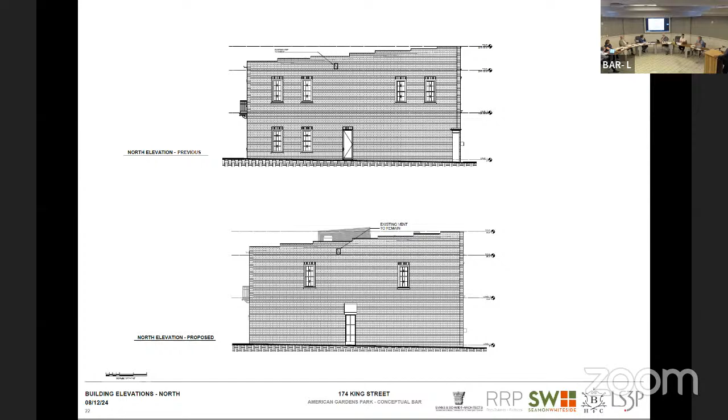There's that elevation before and after. That elevation before and after. I remember too, when I said that, we weren't showing the context of the fencing, and that was one of the requests - to make sure we showed from property line to property line in the elevation.

So that's it for 174 King. I'll turn it over to David Kelly to transition to the landscape.

Hi, I'm David Kelly from Rees Roberts + Partners. I'm the main designer for the park. I'll make this short and sweet because I know it's getting late in the night. And I know you've seen the park, you've been introduced to the park, you've seen the precedents, you've seen what we're attempting to do, the move, the feeling, et cetera.

The major changes we made, which we took from you, were the two areas where the crepe myrtles are encroaching on the foundations of the 174 King building and the 141 Meeting building. So in the case of the 174 building, we actually built the trees up in the short planter to get them away from the critical foundation moment, so that they're safely off that.

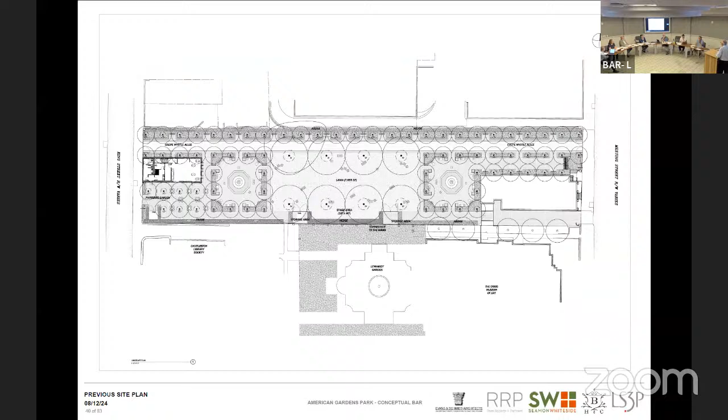Just keep going. You'll just have to go past our precedent still here, but you can have some pretty landscape images. Go ahead, Zen. Tell me when yours is done, because I don't know. When you stop seeing green. Okay, I'm done. And you should be soon. You're there. That's it. Okay.

For us, it was, we had a much bulkier connector. We had to have it. We needed it for mechanical issues, which we've done a restudy on, and figured out how to accomplish it within the back of the building and within a much more condensed connector between the two.

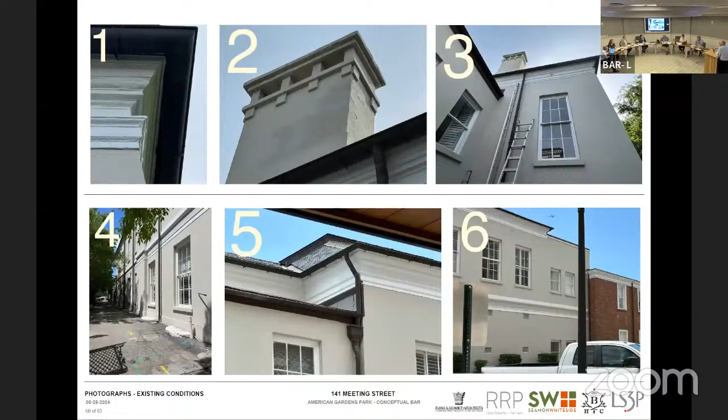These items. And I apologize for you, Trey. You're the one that everybody keeps acting like you know all this. I was actually here for y'all's last presentation, okay, not on the board, I was in the audience. Probably next to you, Joe. Perfect, okay, I'm glad. Didn't even realize you're a really quick study.

This was our before. You see the bulk on the side, on the Gibbes side of it, and the way it was coming across. It was an ABA arch design that we were copying from the Porter's Lodge out to Charleston, and it totally undid Eddie Bello because it wasn't centered on the driveway. And it wasn't possible at that time because of trying to fit all three elements in there.

We realized after we talked to the BMOC people, they weren't really interested in a pedestrian entrance, so we could get rid of the ABA and just go with B, if you will, which allowed us to shift and perfectly align the arch with the thing. We also got rid of the bulky portion of this link up against the Gibbes, which was no longer necessary. So this became a very symmetrical link on itself, that's why we shaded it in. It's got its own identity.

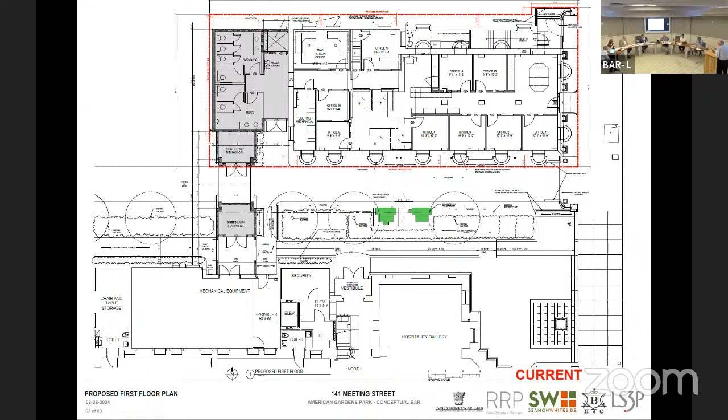We have very slavishly gone back and are going to detail the arch on the ground floor exactly the way E.B. White did the Porter's Lodge arch. I've never plagiarized anything in my life, but we're plagiarizing this because E.B. White was the architect for this building, so the same hand would have done that, and it's rather unusual the way he did it.

Second floor existing, I'm sorry. You don't need a second floor, but you see here you have the bulk again and a hip roof, a gable roof, and we have gone in with a flat roof, which is recommended. Greatly simplified that roof length. The mechanical is being hidden back in behind what we still have as a hip, which is appropriate for the portion behind the actual 141. That will be done in copper.

Existing up top and existing the way it is now, and then the proposed.

So the one thing that we don't show in these renderings, the elm trees, we are not going to eradicate the property line between the two buildings. It'll always be. We don't own the driveway. So the elm trees will be maintained forever and replaced as they go, that run down the property line, which is just to the left of that arch. The hedgerow will remain, and you will only ever view these as two separate properties when you walk down the sidewalk. So you will appreciate looking down the walkway, but you won't see that blank wall on the Gibbes side. You will walk down till you get to the driveway and you will see that tripartite window.

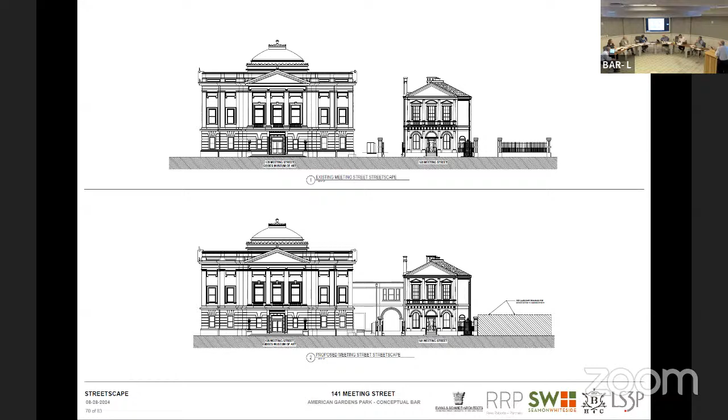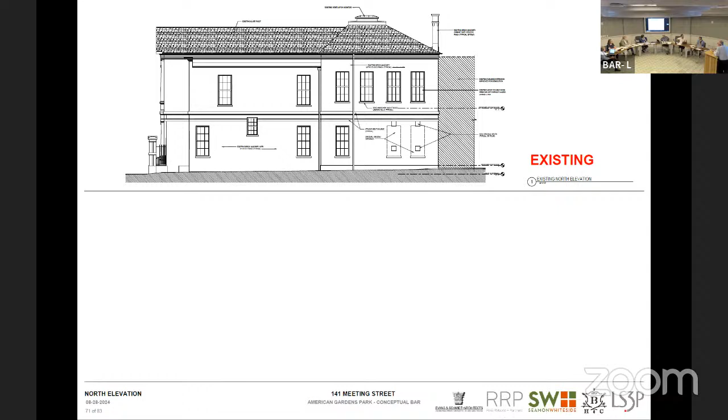This was the north side. There were two windows there before. We want to bring them back. They were removed when they put vaults in place. So this is what we proposed before, previous and current for what you saw. The back wall, the demolition has taken place since we were last here, so now you're looking at the real back wall, which hasn't been seen since 1910 or so of the building.

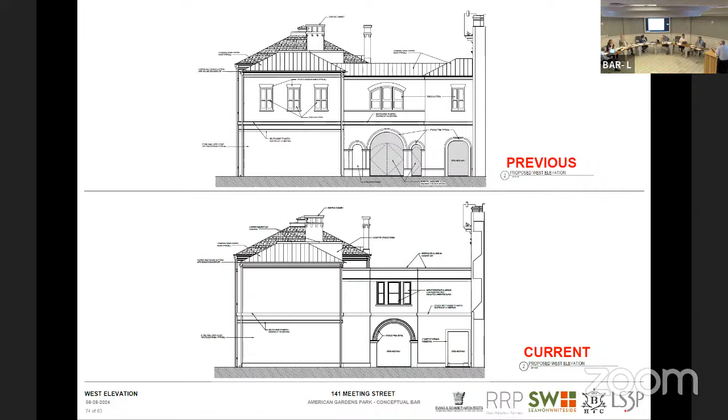Previously, you see the ABA and a lot going on. Now you can see how much more simplified it is with the arch below, a square opening to the Gibbs walkway, and a tripart window without an arch above the arch on the 141 side. We're using 1/1 windows, which brings Gibbs into context, so that's kind of our happy meeting point. The tripart is also a concept that's part of the Gibbs design, so we're differentiating the window as we move from 141 toward Gibbs, or vice versa.

That was previous on the back. That's greatly simplified from the back.

On the existing building now, there's a missing window, as you can see, right next to the chimney breast coming down. Before we didn't put that window back, but now we are choosing to put that window back. It was there originally; it's a plug that was put in during the 1960s.

Existing from the front, you can see the previous and current versions. Again, totally aligned, and do remember, we have not yet dealt with the transformers. We discussed it before, saying there might need to be some kind of screen.

I'm not sure there's going to need to be a screen, because that hedgerow is going to totally engulf those, but we can deal with it. You'll only ever need it for the one side. This is landscape that Gibbs is going to maintain, and they don't want to see them either.

Both transformers, when they're moved there, are going to be facing the driveway, so that's the one side that might want some kind of screen. Again, if we put our trees in there, you wouldn't even be seeing what you're seeing now. It's kind of impossible to see that view. That was before.

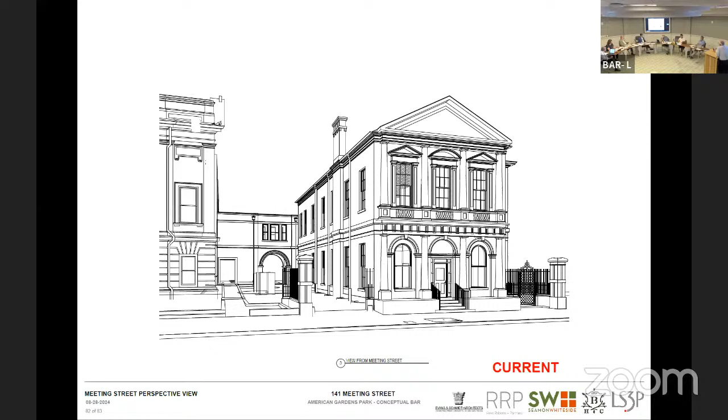That's it. Okay, great. Well, 16.5 minutes ain't bad. Did we really do that quick? I mean, they were plowing ahead.

Okay, any questions to the applicant by the board? Okay, any public comment regarding this?

The removal of the windows on the EB White building, the removal of the windows on the second floor, on the addition—what was the thought behind that? The fact that the garden, the way they have an ABA garden, they've got a more intimate fountain garden, and we've got a museum. We want to be putting art up there, so we didn't have windows, we had fake grills. We got rid of the fake grills up there, because they can't live in it, and they didn't want windows.

They're also bringing in full-grown trees that will already be 30 feet tall, and hedgerows. So we looked at it and said, how else can we pattern this back wall to make it look like cutouts that resemble windows? Every time you do that, it looks like they were windows, just like the ones floating up on the building now. So we've taken this as a blank slate, a backdrop for the park. We have no contact with the park directly, and we don't need fake grills. Our thought was just to keep it clean, and everybody shared that same opinion.

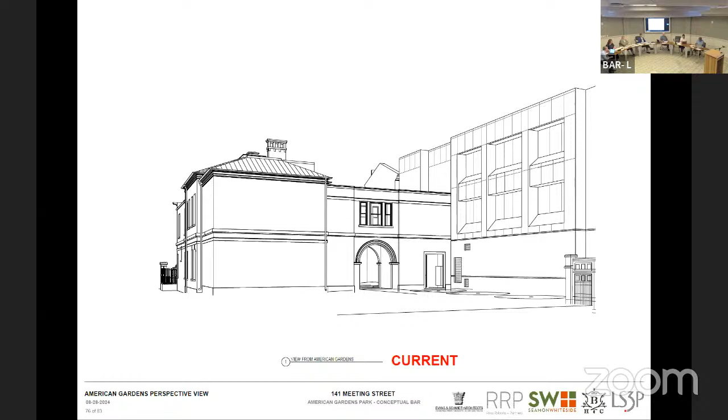No further public comments, so board staff comments and recommendations. Once this project receives conceptual approval as a whole, the future individual pieces should come back as separate applications for the next stages of the project.

The comment regarding the American Gardens Park, applicant has met previous board and staff comments by listening to concerns about the impact of the crepe myrtles alongside the EB White building by moving them farther back away from the historic structure. And I should have added King Street here too, it's just an omission. All other aspects of the site plan remain unchanged and were previously supported by board and staff.

For 174 King Street, applicant has met previous board and staff comments through the restudy of the facades to minimize impact to the historic fabric and historic character of the building. Staff supports the new composition of all elevations and their associated demolition.

For 141 Meeting Street, board and staff previously supported height, scaling, mass and architectural direction of the north and south elevations. Applicant has met previous board and staff conditions by simplifying the architectural expression of the proposed west and east elevations. Specifically, staff support the simplification of the roof form above the bridge connection, the alignment of the Meeting Street elevation arch with the access passage into the garden, and keeping that arch as a singular such expression on the bridge connection.

Just as a side note, the larger site plans and then the building specific plans, the gates swing in different directions. So we just want to make sure moving forward that they are in agreement with each other.

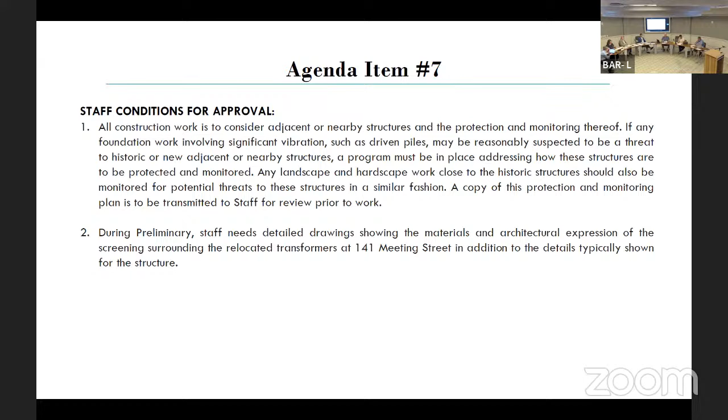For all three, it is conceptual approval with board and staff conditions, but staff is additionally recommending a final review by staff for the site plan for the garden park, and also final review by staff for 174 King Street, given the minimal intervention happening there.

Great, thank you. Applicant response with clarification. You don't have to. Okay. Board discussion.

Well, I'll keep on. And like I said last time, I don't want to overlook. This is a fantastic project. This park is going to be amazing. It's great to see these buildings renovated. So just don't want to overlook that as I jump into a comment. Thank you again, I'm really excited about the whole thing. Thank you also for the changes to the King Street building. I have no comments on that. Very good, thank you, the park's awesome.